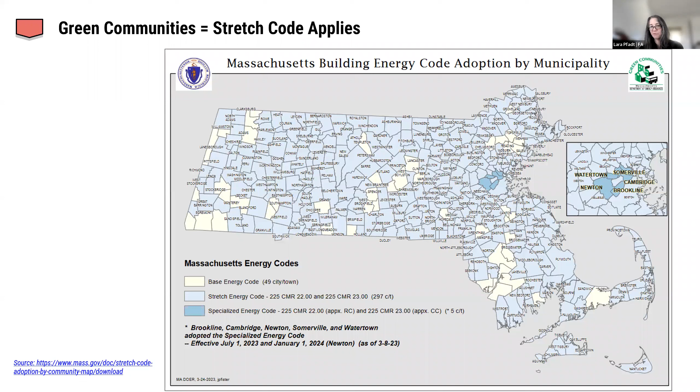This is all of our Massachusetts municipalities. As you can see, we as a state are very much stretch code. There are 49 towns, municipalities that are not, they're still in base code, but the majority of 297 are stretch code. We do have our specialized codes that have opted in as of a couple weeks ago. Brookline, Cambridge, Newton, Somerville, and Watertown are all specialized code, and that will be coming into effect either July 1st or January 1st, depending on the time frame that they were adopted.

As just really another way of looking at that, we have multiple codes in place in our state. We have the IECC as our general base code with the Mass amendments. In Massachusetts, we always have those Mass amendments. And if you are not a stretch code community, if you're working in one of those 49 communities, then you are in that base code, just the IECC with Mass amendments. After that, you then move into stretch code communities, the majority of our state, and then the specialized opt-in code, as we talked about, just those few communities that have already been able to pass that.

Again, another way of looking at that, because there's timelines overlaid on top of all of this. As we knew, the technical guidance came back out in December from the DOER, which was great. It gave us a view of what was coming. And then at the beginning of January, the residential folks kicked in with that stretch code. And then we will be seeing on July 1 the commercial stretch code kick in. And so it will start to really take effect for all permitting projects after that.

And as we mentioned, the opt-in code will kick in January 1, or for those few communities that got in time, July 1. And then we also have the lowered values, those escalating values for HERS rating that will also take effect in the following year. So I will hand this over to Lauren to start us on our path.

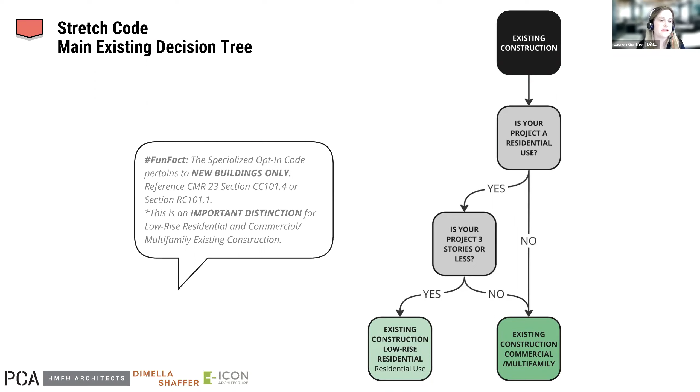So I'm going to talk about the existing low-rise residential branch, and Sunny will present the existing commercial and multifamily branch. And throughout the presentation, we pepper in these fun facts. And so this one first pertains to the specialized opt-in code. And we do provide references throughout these decision trees to show you where we have gotten this language. So this specialized opt-in code pertains to new buildings only. And as we talk about the decision trees on the next few slides, this is an important distinction for low-rise residential and commercial existing construction. So next slide, please.

So we're going to get into the existing buildings low-rise residential decision tree. So here is the overall low-rise residential tree.

And I don't know if you can hit the space bar. Sorry, I forgot to coordinate that.

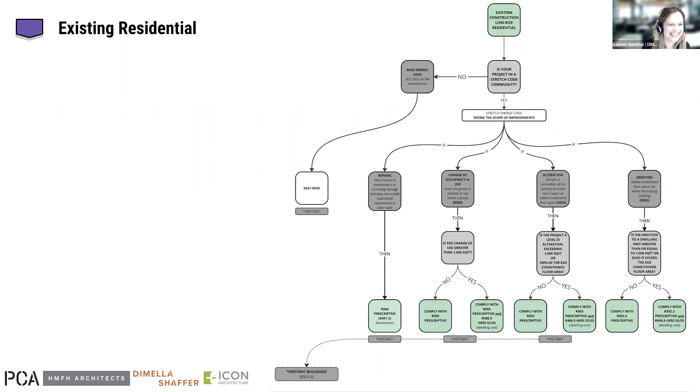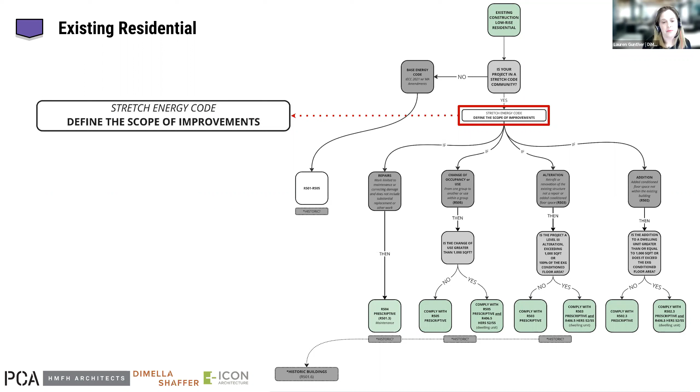So the first question leads you to determine if your project location is in a stretch code community. If your project is not in a stretch code community, then you'll follow the base energy code, which is IECC 2021 with MA amendments. If yes, your building is within a stretch code community, then it will take you into the stretch energy code, define your scope of improvements.

So I'll first be talking about repairs, change of occupancy or use, and alterations. And then lastly, if you just do spacebar, sorry, I'll be talking about additions.

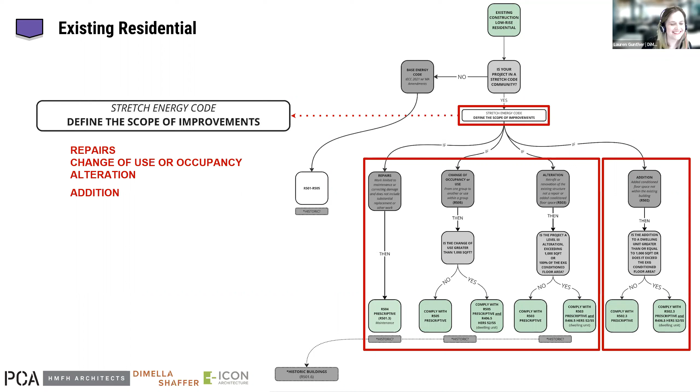Okay, and on the next slide here, throughout our discussions, we have felt it helpful to provide an additional layer of information in addition to these decision trees. And we've been calling them fun facts. So this is the first time the stretch code applies to existing alterations, change of use or occupancy, and additions. In the previous energy code, it was under the base energy code, and now it's within the stretch code.

So additions, alterations, and change of use or occupancy each have different requirements. So if your building has an addition and an alteration, then compliance is required for each portion. So each portion has to comply with the requirements for that specific update to that building.

Lastly, levels of alteration are applicable to the decision tree for the low-rise residential existing construction energy code requirements. And this is a big distinction between the existing low-rise and the existing commercial, which Sunny will elaborate further when she talks about that.

So the next few slides are going to focus on repairs, change of occupancy or use, alterations. And so another distinction between low-rise residential and commercial energy code is that low-rise residential has this extra middle layer of questions, which then lead you into yes or no buckets.

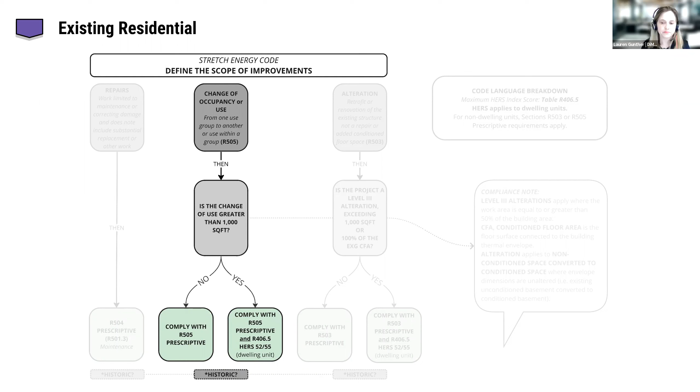So then getting into alteration, an alteration applies to non-conditioned space converted to conditioned space where envelope dimensions are unaltered. So for instance, if you have an existing unconditioned basement where the basement walls are already existing, and you decide to convert that to a conditioned basement, then that is an alteration. So this is an important distinction between alteration and addition. When you don't increase the existing envelope surface area, then that is an alteration.

So next question, is the project a level 3 alteration exceeding 1,000 square feet or 100% of the conditioned floor area? So level 3 alteration applies where the work is equal to or greater than 50% of the building area. So again, Sunny will touch upon how that is different in the existing commercial code. So the CFA, or conditioned floor area, is the floor surface connected to the building thermal envelope.

So if no to that question, then you comply with the prescriptive requirements under section R503. And then if yes, then you comply with prescriptive and HERS 52 or 55 for the dwelling unit.

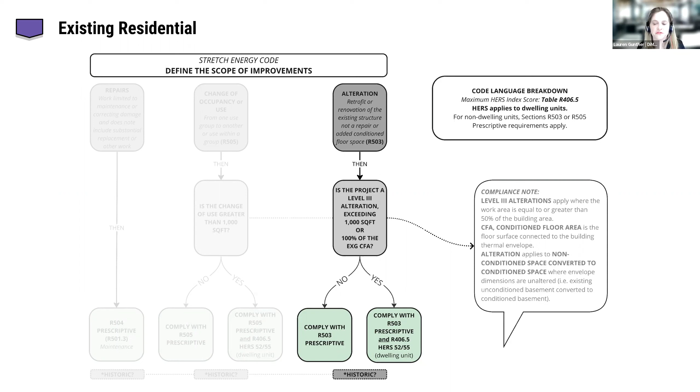So then the next question is, is the addition to a dwelling unit greater than or equal to 1,000 square feet, or does it exceed the existing conditioned floor area? So if no, then comply with prescriptive requirements under section R502.3.

And then if yes, you comply with prescriptive and HERS 52/55. So another item to note is that new envelope assemblies in additions of less than 1,000 square feet would then be exempt from air leakage testing. So that's another good point.

And then an addition fulfills the requirements of this code where the addition alone complies, or where the existing building and addition comply as one building, or where the existing building with the addition meets the HERS index score 52/55.

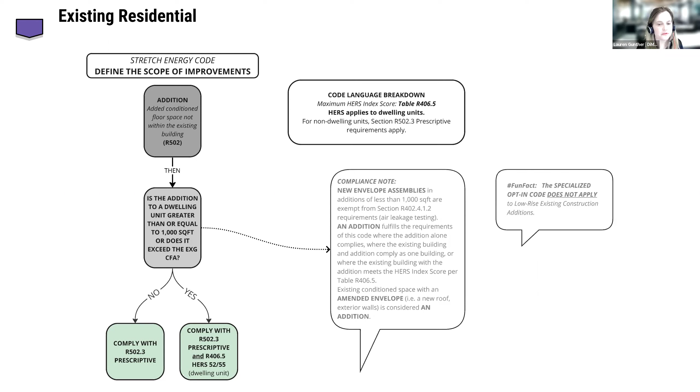So lastly here, looking at historic. The historic energy code language can be found in section R501.6, and it applies to repairs, change of occupancy or use, or alterations. So those are the three where it could apply. Historic buildings are not exempt from the energy code, though code officials may provide waivers for specific requirements within the code that cannot be met because it is proven that they could destroy the historic nature of the building.

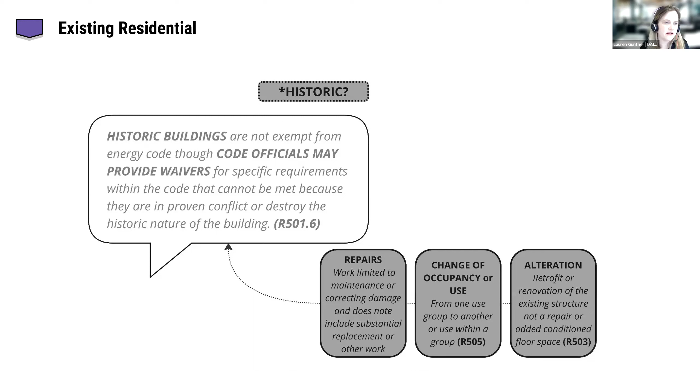So I know there's probably a lot of questions about what that all means, and we can certainly open that up after we go through this to discuss further. One thing I forgot to mention is the specialized opt-in code does not apply to low-rise residential additions, whereas when Sunny talks about the commercial code, you'll see that is a difference there. So thanks.

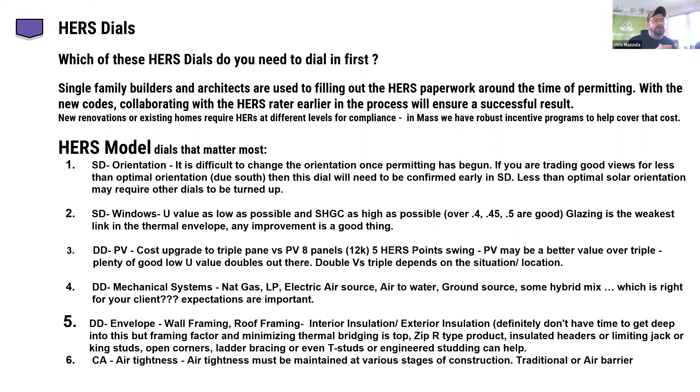And then air tightness - getting that blower door test down to somewhere close to 3 ACH. The 2021 IECC is a 5 ACH. It actually went up because the HERS scores went down, and houses are just tight. So there's different ways of getting to that air tightness.

So this is our transition slide. I'm going to hand it all over to Nick - he's going to talk about some building science stuff. But essentially, the screen on the left is an Ekotrope glazing screen, and it just kind of shows you we want to limit the amount of glazing we have. We want to maximize the orientation of that glazing. We're looking for low U values and looking for high solar heat gains. That's one of the biggest dials to get to 55, 52s, 45s, 42s, and then eventually the HERS negative threes. So, hand it over to Nick.

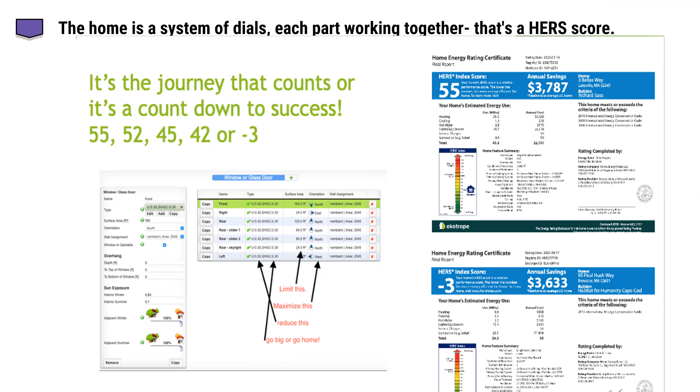Thanks. So I'm Nick Falkoff with Auburndale Builders, and we've been building all-electric passive homes for a number of years. I'm working with Chris in the New England, with the Northeast HERS Alliance, to develop a course. We're working on a 4-part course right now, which will dig more into each of these dials. Chris's team is modeling live while we're talking, and we're trying out different dials.

I'm coming from a passive house perspective, where I'm used to architects or energy modelers modeling WUFI, and WUFI does hygrothermal analysis. I'm used to looking at where the moisture is moving in the walls. It's interesting to see - we used to exceed our HERS numbers by so much, I never really looked at them. But now that the HERS numbers are getting tighter and passive house is an alternate route, I'm sort of looking at what's the difference.

One thing I'm seeing is that with wall insulation, you want to watch out. If you start to dial up an existing building's insulation, you really want to look - the Ekotrope software does not do hygrothermal analysis, and you want to look at where your dew point is in your walls. So if you're trading off in the dials and you say I have to bring a whole building up to or down to a HERS 42 or 45, just be careful and watch your R value. So I put a link to Green Building Advisor - that's just something I'm seeing.

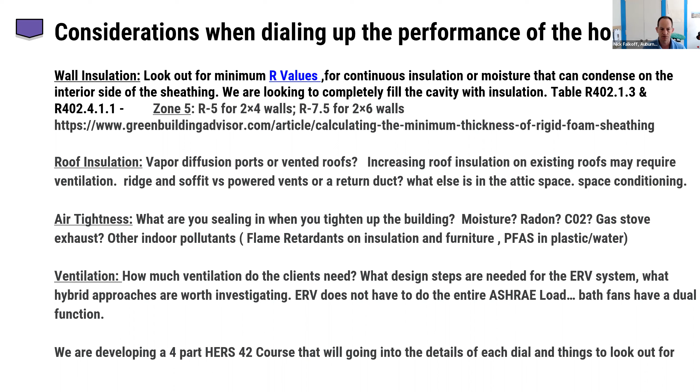All right, so now we're going to move away from residential and into the existing commercial compliance paths. Lauren gave a great intro to our process and how we were working through this and who's helped with it. But if we're here, you've decided that your project is not residential.

We're going to start by defining the scope of improvements, starting with repair, change of use or occupancy, and alterations. We've grouped those together because they're generally in the prescriptive compliance paths. Then I'll talk a little bit about additions, going through some of the requirements of each, but reading through the appropriate scopes within the code and discussing with the AHJ is the best way to confirm the appropriate path. So I want to make sure we keep honing in on that. Go ahead and go to the next slide.

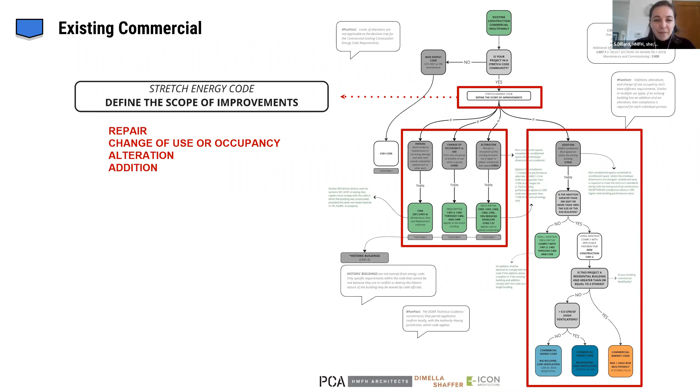Let's start with some fun facts. This is the first time the stretch code applies to alterations, change of occupancy or use, and additions of all sizes. That's similar to low-rise residential. All scopes have different requirements, so if a project fits into multiple scopes, compliance is required for each portion. For example, if you have a renovation and addition, you'd have to comply with both of the different scope paths. Like Lauren said, unlike residential energy code, the commercial code does not look at level of alterations as guidance for compliance. We'll walk you through what that means in the next slides.

In each of the next few slides, there's a little decipher at the top right for these code sections, because these existing building code sections point you back toward new code language. So it's important to remember that all of these sections will point you back to the new stretch code. I'll go through them really quickly, but this will be the only time.

C401.3 is guidance for the thermal envelope certificate. C402 are the envelope requirements, like the R and U values for roof, slab, walls, and fenestration. C403 through 405 cover the MEP requirements. C406 are all those fun tables of additional efficiency requirements covered by project type. And C408 is maintenance and commissioning. Go ahead and go to the next slide.

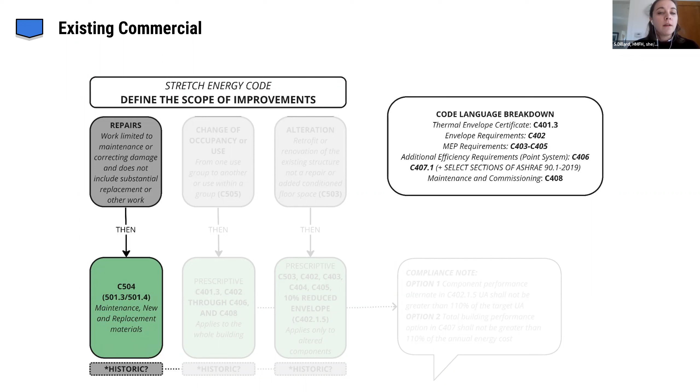Next slide: change of use or occupancy, which is C505. This is prescriptive compliance, and the intent is not to require energy modeling for a lot of existing buildings, though some of the paths they talk about will lead you to using energy modeling. But the guidance is really trying to make everything prescriptive for existing buildings. So the rule of thumb for change of use or occupancy that we've been saying is, if you touch it, you have to upgrade it—but that actually doesn't apply here. This scope applies to the entire building. So if your building changes use or occupancy, you need to upgrade the entire building, and that reference is in the new code envelope, MEP, maintenance and commissioning sections.

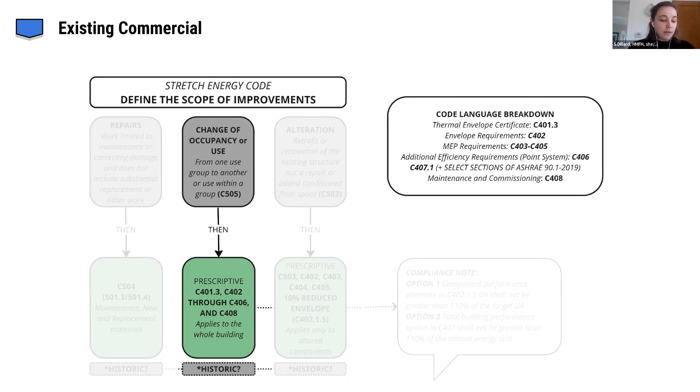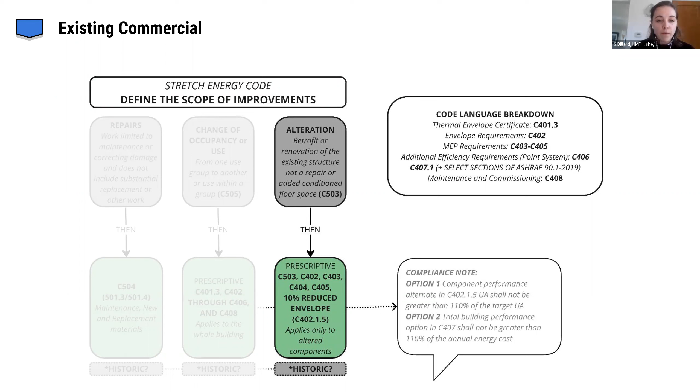Unlike change of use, alterations only apply to the altered component. So with this one, if you touch it, you do have to upgrade it. It encompasses non-conditioned spaces converted to conditioned spaces where envelope dimensions are unaltered or not increased. That's sort of the major difference between change of use or occupancy and alteration. And again, it goes through the different prescriptive compliance paths like C402, which are the thermal envelope requirements, and then MEP. Go to the next slide.

I just want to note that with change of use and occupancy and alterations, there are alternate compliance paths other than the prescriptive compliance path. On the side here, you see we've got two additional compliance paths that will require energy modeling, and it's usually having to deal with a less stringent envelope.

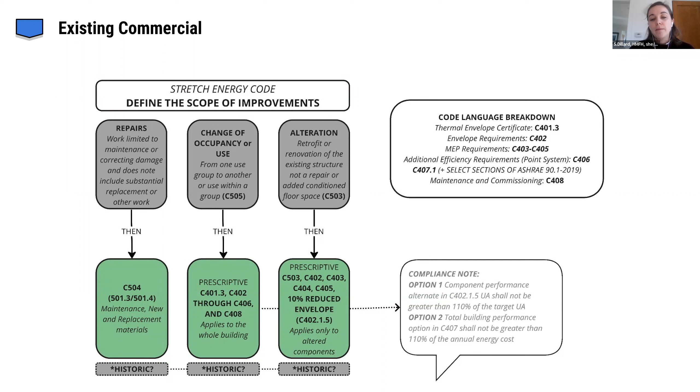Historic—what does it mean if you're working on a historic structure? Similar to the previous code compliance, a project team can prove that specific measures would degrade or conflict with the historic nature of the building and request a waiver from the code officials. The intent is really to upgrade when you can—we don't want to destroy the historic nature of our communities. So this is really hoping that you'll work with the authorities having jurisdiction and the folks that are helping you to upgrade your envelopes.

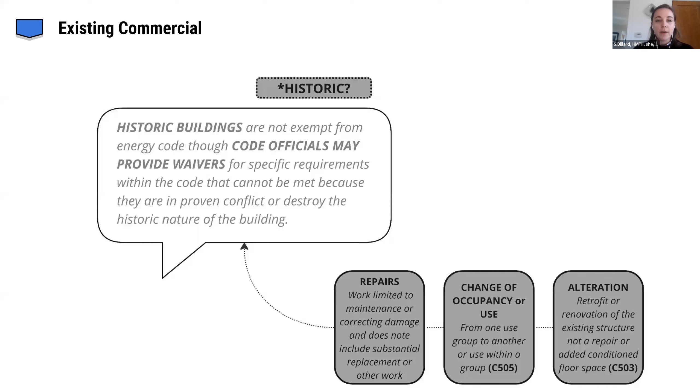So upgrade it if you can, and if you can't, then talk to your code officials to get a waiver from that.

Finally, additions. There are a couple more questions here. Is the addition greater than 20,000 square feet or greater than 100% of the size of the existing building? This is non-conditioned to conditioned where the envelope dimensions have changed. If you answer no to that question, it drops you right down to prescriptive compliance.

And that's the new code sections covering envelope, MEP, and commissioning, plus the additional efficiency requirements. If you've answered yes to this question, fun fact, the addition is treated like new construction. I'm not going to go through the entire new construction branches, but to get you to the right path, there are a few more questions.

The first is, is this project a residential building and greater than or equal to 4 stories? Basically this is asking, is this a multifamily project? If yes, you go to the commercial energy code that covers mid to high rise multifamily, which is 4 stories or greater. If you answer no, then there's one more question.

Is your building's ventilation rate greater than 0.5 CFM per square foot, or less than 0.5 CFM per square foot? Yes or no, that puts you into big buildings, low vent, or big buildings, high vent. As Lara said, we'll go through these paths at a later date, but that'll get you to the right bucket. I also want to note that an addition can show code compliance if the addition alone complies, or if the existing building and the addition comply as a single building.

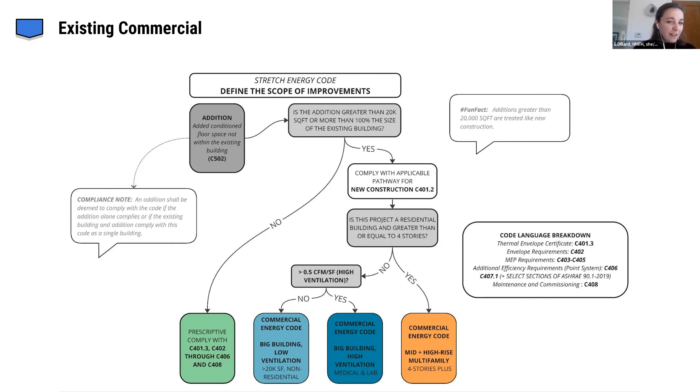So the commercial branch is a little bit easier to run through, and Lara's going to walk us through an example now.

Thanks, Sunny. Because I'm a visual human and I learn from example, and I think a number of us do, these decision trees are great to get us to that point, but then we wanted to just walk you through quickly how we're doing it.

So this is a project that I'm working on that will be under the stretch code. It is an existing historic building, as you can see from the photo, of about 24,000 square feet. It will have an addition of around 9,000 square feet. It's currently a 4-story building, wood framed with brick facing. We're in climate zone 5.

It will be a public space. It's in a historic neighborhood, but not a listed building. It's had some recent work, redone windows, solar on the roof, and it has some high sustainability goals. They'd like to consider geothermal.

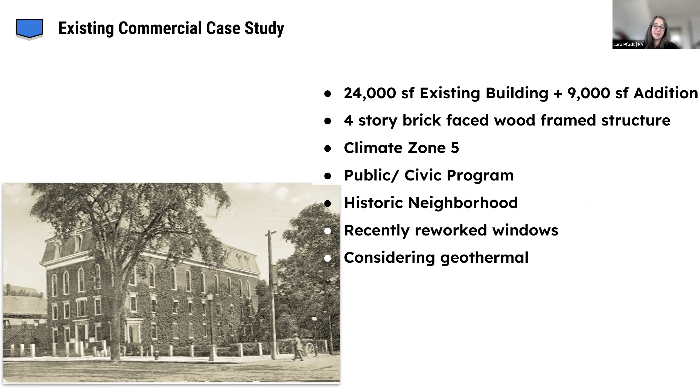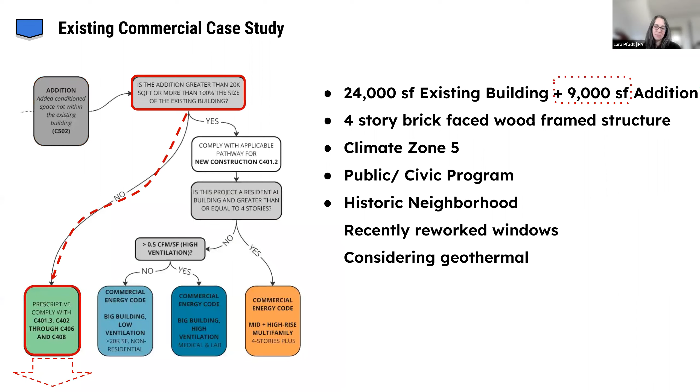So just a bit of its program. What does that mean, taking us through the decision tree? It has an addition, so that's already kicking me into the addition path. Is that addition greater than 20,000 square feet? No, so I get to take the chute or ladder—I guess chute—down to the prescriptive compliance path.

So I'm just going to quickly walk you through the means that I walk through with this prescriptive path, and I'm going to focus on the envelope requirements because I'm an architect and you don't want me to play mechanical engineer or any other discipline.

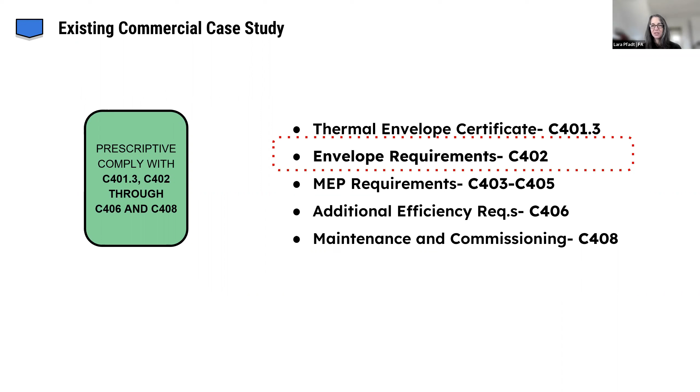But I will note that the additional thermal envelope certificate aspect is relatively straightforward, but for the other 4 aspects of this, go back and listen to the overview talk we had in January. It goes into good depth on those and will hopefully answer any questions. And then if you have further questions, come to the next talk.

So as I noted, just walking through those envelope requirements—and as Sunny noted too—these are the breakdowns of what happens for each section, and then further breakdowns of C402. We get into the R values. So these are our envelope requirements.

Reading through an attic space code, these are the weighted values. So the roof for attic comes out to about an R47 if you were doing that portion. So we would be insulating within our existing building, and obviously at the addition as well.

The walls themselves, above grade walls, from the prescriptive code requirements for wood framed are about an R20. So we would be, because of the historic nature, insulating to the interior, and of course going greater at our addition.

I will note here too that, not for this project but for another project we're looking at, we are looking at this exception. So there is this exception for existing buildings—the existing buildings section of the code, the 500s—that notes there are a few exceptions for alterations, because working on this building is the alteration, not the addition.

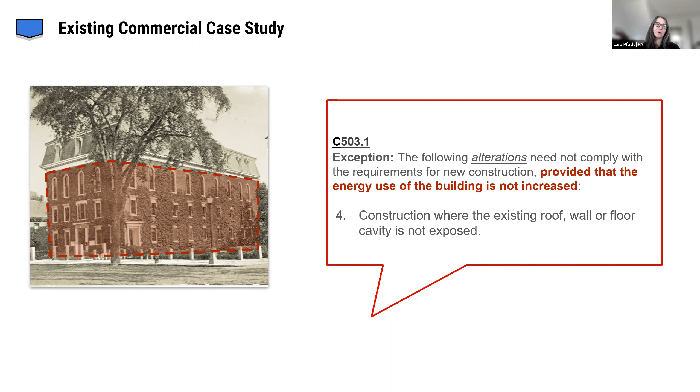And number 4 is construction where the existing roof, wall, or floor cavity is not exposed. We are exempt, we read that as being exempted from meeting those values. So if you weren't taking the plaster off these walls, that is how we read that. And we'd like to have further conversations with our AHJ and the DOER, but I believe that's something we should be looking at. Moving through this building is not how we would be working through that.

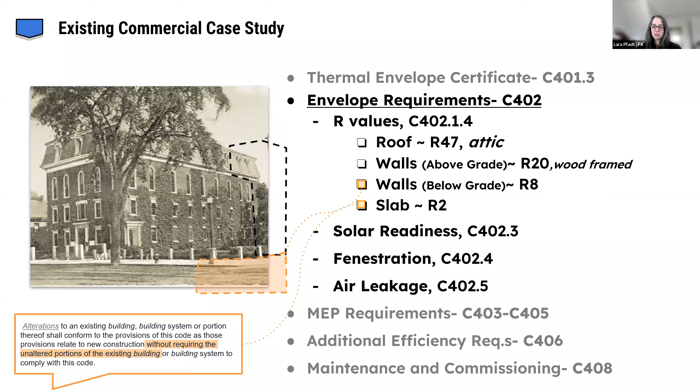So walls below grade are 8, and below slab are 2. But again, the alterations, we are not affecting the existing slab. So we read that as not requiring the unaltered portions of the existing building. We are not touching the below grade slab or the below grade walls. We would still be insulating to the interior of those walls. But as noted, we look at dew point in any of these scenarios. We'll be doing dew point and WUFI analysis of those existing walls to make sure we're hitting a level that would not be causing issues to the existing structure.

And then 402.3 is the solar readiness, which is also addressed in Appendix CB. We actually have the lovely aspect on this project that the roof has recently been replaced with solar on it, so we don't need to worry about that, but on our addition we would obviously be solar ready.

And then fenestration, as I noted, the windows in this building were recently renovated, but they will not meet the U values and the solar heat gain coefficient values of the new code. So we will need to address those throughout the building.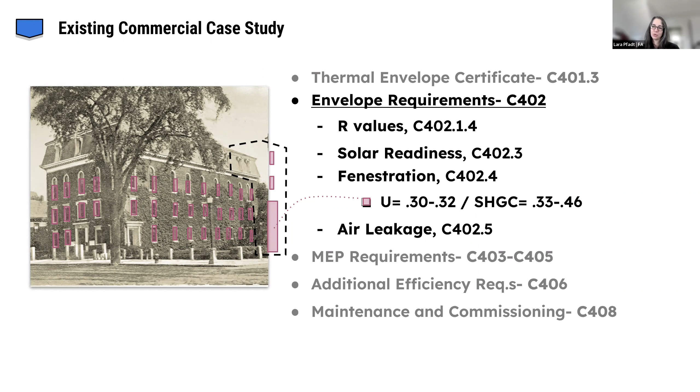And kind of a separate fun fact, not on this building but another project we're looking at the same time, there's an exception in existing building alterations that as long as we're not increasing the energy use of the building - that's key to any of these exceptions, no increase of energy use - which sounds surprising, but often these buildings were not air conditioned, so if you're adding air conditioning that could be a trigger taking you over. So just putting that disclaimer out there: as long as we're still reducing our energy use, you have an exemption for adding storm windows and not triggering the window upgrades.

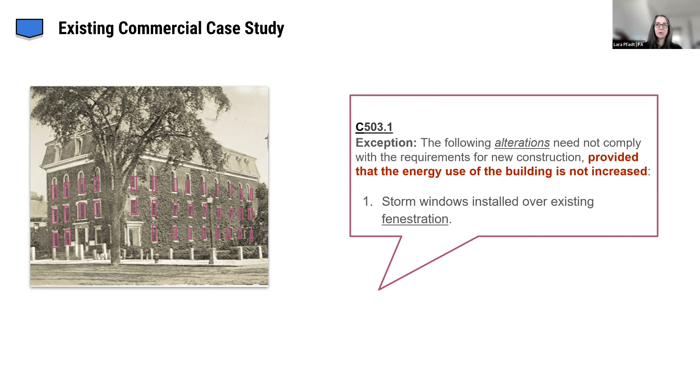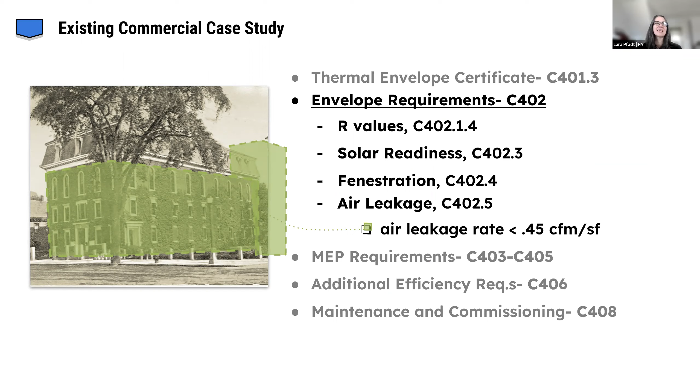So then another big one for us is air leakage, and how do you decrease or increase our air leakage rate for meeting this, creating a whole air barrier. It's obviously tough detailing once we get to existing buildings, but addressing that. And again, exemptions apply if it's not required for roof recover or replacement, if the other portions of the building are not being renovated.

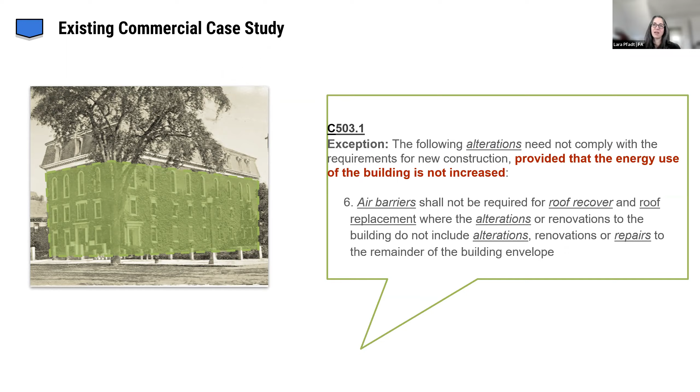So I know that was a very quick version of a case study, but it's just to start to think about how we implement these pieces. I'm sure we'll have questions, and I know folks have been asking in the chat, so we appreciate that. But now I'll hand it over to Kim to take us through some more additional considerations.

Thank you, Lara. So just in general, the rule of thumb for existing building alterations is: if you touch it, you have to upgrade it. And those upgrades have a lot of implications on your building, as we've kind of touched on.

So on the next slide, if we just quickly run through some of these energy improvements that wouldn't require further upgrades - I know Lara touched upon a couple of these in her example. The addition of storm windows, you can apply surface films on single pane glazing, roof recover but you don't necessarily need the air barrier, and you can do an overclad or just addition of interior insulation if you do not expose wall or roof floor cavities.

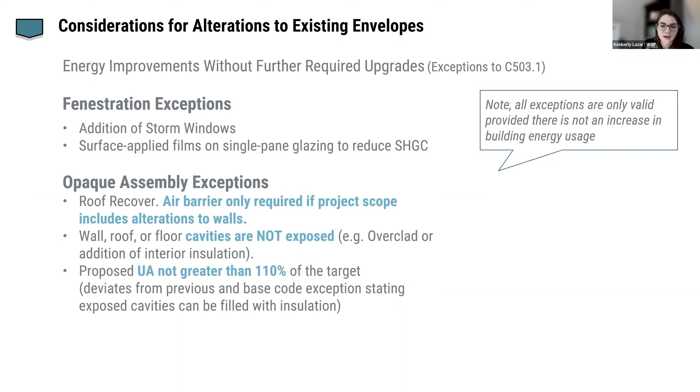But what I really want to focus on is the last one, where the proposed UA is not greater than 110% of the target. If you go to the next slide, we can see what those targets are. They're different between a low glaze and high glaze building. These are the adjusted values for that 110% from what the new construction code is, and this is the only exception on that list that is different from what the base code has.

It's important to note that while it might seem like a great idea to strive to use this exception, to use that increased 110% of the target, the UA factor only allows for an increased U factor of the opaque walls. It does not allow a different fenestration factor. Also, if you're not going to replace your glazing, it will be difficult to achieve an overall UA of that altered space, because if you have single pane glazing, it's going to bring your UA value up a lot, so you'll need a lot of additional insulation. You don't want to just keep adding insulation without considering condensation and other effects on your building.

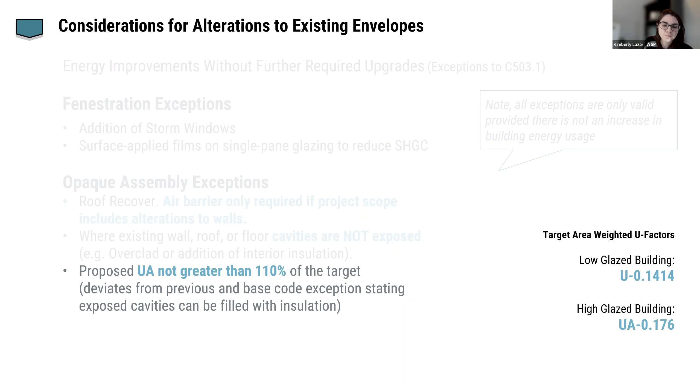Other things that need to be considered, for both the prescriptive requirement of U factors as well as the UA compliance in the component alternative pathway, is that insulation values need to be derated between the studs, as well as accounting for any linear or point thermal bridges. While we've always had to derate between stud insulation, the new additional accounting for thermal bridges is new in the stretch code. All of these have to be taken into account before compliance.

On the graphic, it's showing the interruption to floor lines. That's something we can't design around because it's an existing building. In new construction, we can add a thermal break there and mitigate some of that heat loss. But in an existing building, we have to work with what we have, so that's something that has to be taken into consideration much more heavily.

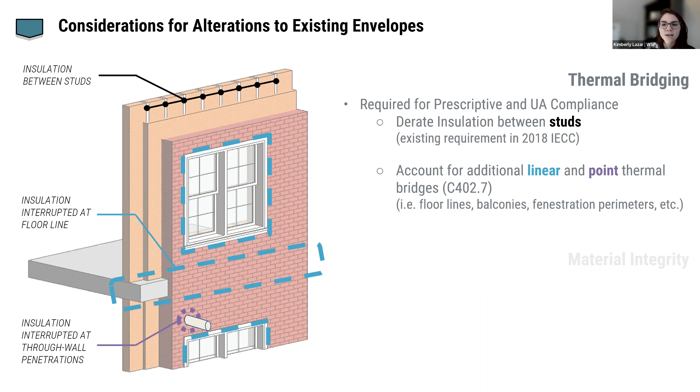And then I think probably one of the more important ones, something I've seen a lot in the chat as well as others have mentioned, is the material integrity of these buildings.

A lot of the building stock in this area, especially, consists of mass masonry buildings that currently operate by being able to take on water, but then dry to the interior and exterior. As soon as we add interior insulation, it's inhibiting that drying to the interior, and it's accumulating more water within the system. So it's really important, and we always push clients to take the time as early as possible in the design process to collect and test masonry samples, and then use that for informing hygrothermal modeling, such as WUFI, to assess the impacts of adding that interior insulation, whether that's increased risk of freeze-thaw potential or risk of mold growth on interior finishes, whether at the interior sheathing or somewhere within the insulation itself.

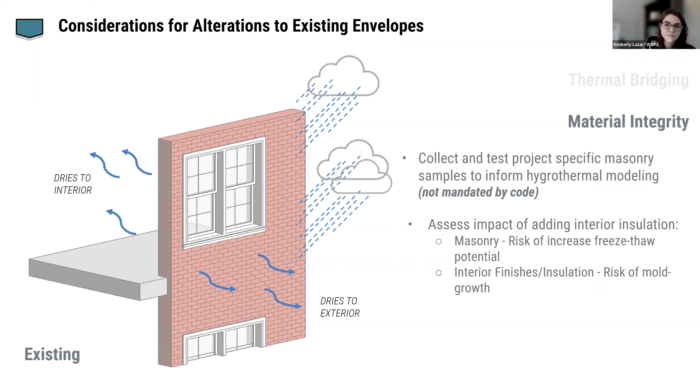This just shows that inhibiting of drying to the interior.

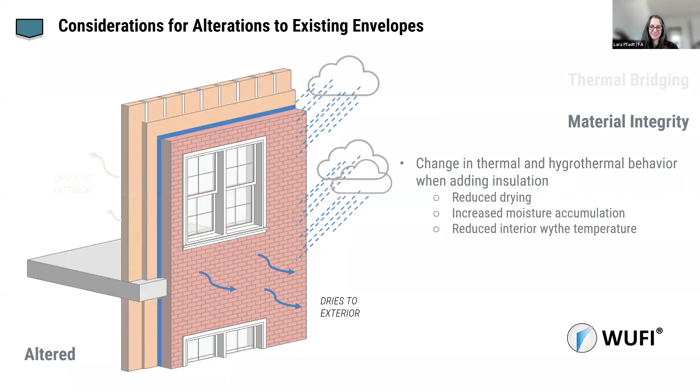Thanks, Kim, that's super helpful. I know all of us working with existing buildings are looking at this, both residential and commercial at this point. And now we have Patrick to wrap us up with a few other existing building energy considerations.

If that wasn't enough, if the stretch code wasn't enough, we know there are a number of other items to look at. Thanks, Lara. So navigating all of those and trying to figure out exactly where you fall on those decision trees, I don't want us to lose the forest for the decision tree. And the forest is that we are trying to decarbonize all existing buildings. Within Boston, roughly three-quarters of emissions in the city are related to existing buildings. And the code only applies to buildings that are newly constructed or renovated in any given year, which is a small fraction of all existing buildings within a jurisdiction.

Different municipalities have different policies in place, different types of policies requiring benchmarking of energy. Now, through the Massachusetts climate bill passed last year, there will be a state-level benchmarking energy reporting requirement for large buildings. But there's also energy auditing, emissions limits, clean power programs, and the pilot program for fossil fuel bans. So there's a lot of other policy outside the code that you just need to check whether it applies to your local jurisdiction. I want to spend more time talking about BERDO in Boston and also BEUDO in Cambridge.

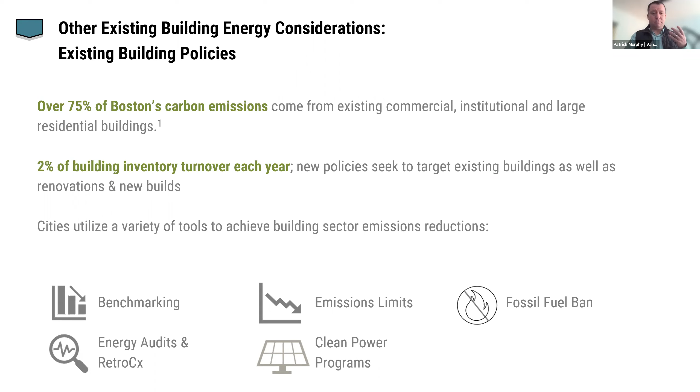And there's a proposal for a similar emissions limit in Newton. What that is, is a relatively simple calculation of the emissions associated with your existing building: the gas consumption, plus the emissions associated with your electricity consumption. You can deduct any clean power that you procure or generate on site, and you have to be at or below a CO2 per square foot number. This is not a code requirement. This is something that applies to every building you are designing now, and every building you own that's over 20,000 square feet is subject to this policy, and you have to be at or below this emissions limit.

So let's say that your building is going through a repair or maintenance, or a replacement of a water heater or something like that.

Prescriptively, you may not need to electrify that piece of equipment, but you really should think about it and plan for it. The reason is you're trying to get the direct site emissions to zero if you can. Take advantage of the grid getting cleaner, install renewables if you can, all with the goal of reducing the CO2 per square foot of your existing building.

When you touch that building or that piece of equipment, that is the prime time to make that investment to upgrade, to electrify, and to improve the efficiency. Just because the prescriptive requirement to upgrade in kind might not force you to go to a heat pump, for example, doesn't mean you shouldn't, especially in jurisdictions like Cambridge and Boston that have these emissions limits. If you go next, Lara.

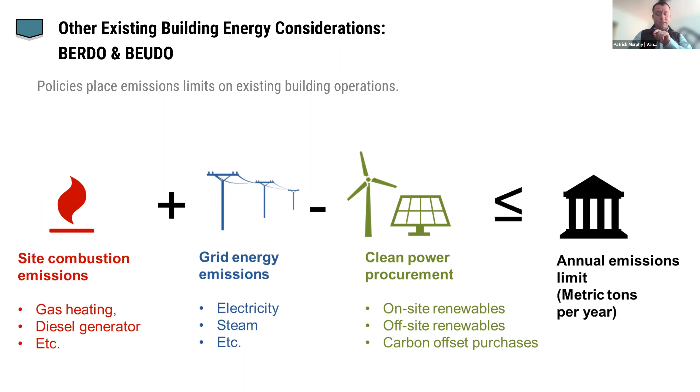The reason I'm saying this is those emissions limits go down over time to zero. There are different levels of emissions limits based on different project types or occupancy types. There are higher limits for the high ventilation type buildings, the labs, the healthcare, et cetera, lower for multifamily or for office, but they all go to zero.

And the only way to get there is to make the strategic investments in existing buildings to reduce their emissions, to electrify, to improve efficiency. So just because you comply with the code does not mean you are going to comply with these laws. So let's look at an example. If you go next,

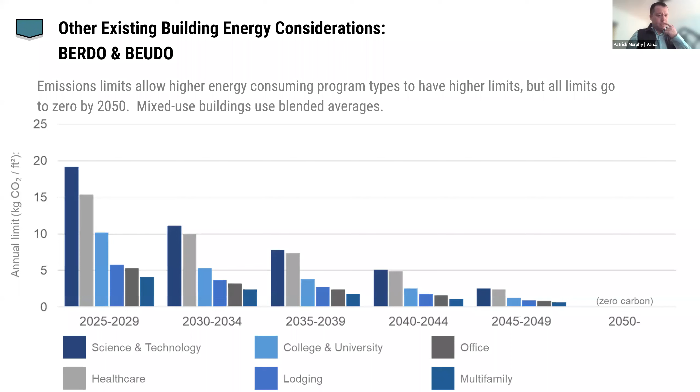the compliance paths within BERDO are: one, operate below the emissions limits. That's the most straightforward way to approach it. Or there's an alternate compliance payment, or you purchase renewable electricity through municipal aggregation, renewable energy credits, power purchase agreements. But the goal, I think, is just to operate below those emissions limits.